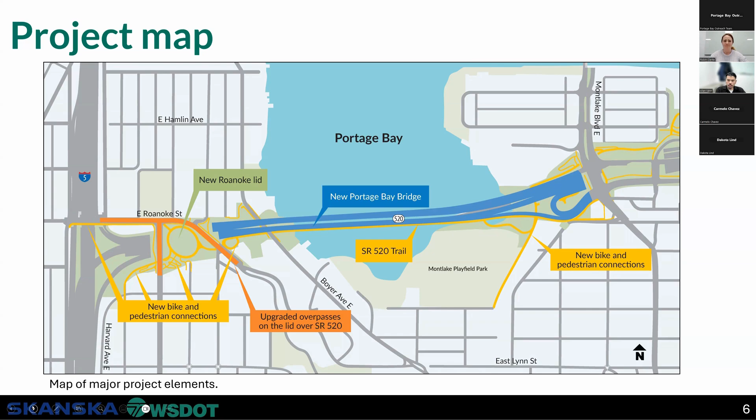So where we're at in our project schedule, as I mentioned, we're in our design process, but we're also starting out in our early stages of construction. So the big focus right now, for those of you who are new and returning, you may have noticed outside in the bay we have some pile driving going on, our barges and those large cranes out there on the water.

The last item on the schedule shows our in-water pile driving seasons. The star at the very top is where we're at, and part of that Portage Bay North Bridge construction is getting the pile driving going for our work bridge so that we can start on our Portage Bay North construction foundations via the work bridge.

We're about halfway through that first in-water pile driving season, which ends on April 30th, and we'll have a couple more seasons throughout this project.

A couple more highlights on here: we have the removal of the existing 520 bridge that'll happen a little bit down the road, as well as the construction of the Portage Bay South Bridge. We'll have the Roanoke lid construction that begins very soon and continues throughout the big part of our project schedule. And then we'll have some landscaping or urban aesthetics, including the regional shared use path connections.

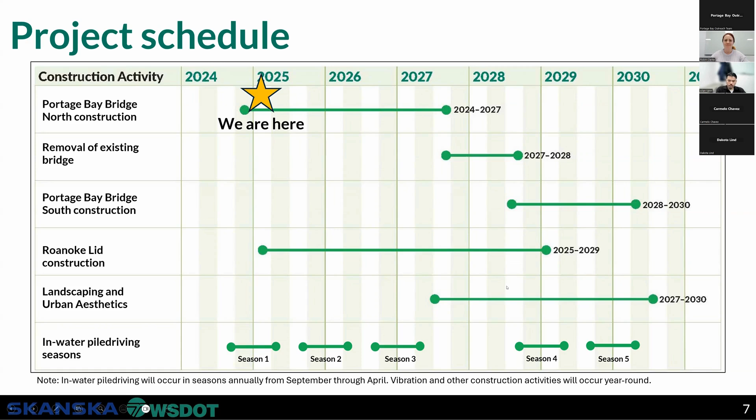All right, with that, I'll get into some construction progress.

So just some overall construction progress updates since we last met. In December and January, we got quite a bit done. We've continued some of our impact pile driving, as I mentioned, throughout the bay.

We're also working through a lot of identifying underground utilities via potholing in different sections around the project. We're doing some soil testing for geotechnical analysis to help facilitate our design progress on some of the local streets you see here on the screen. And we've also been doing some bird deterrent device installations to prevent nesting on the existing 520 bridge.

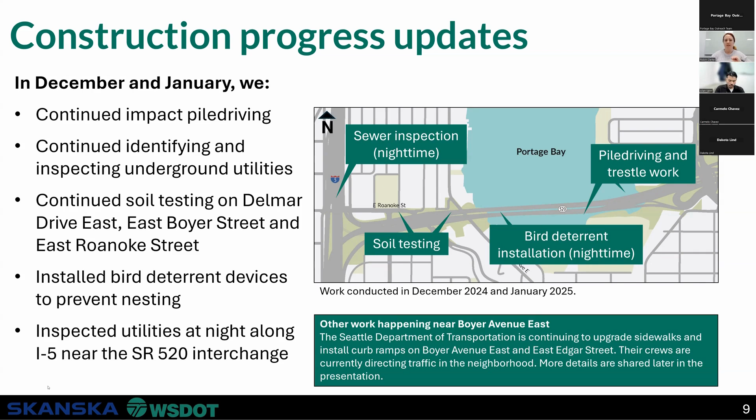And then we've done some general inspection of utilities during the night along I-5 near the 520 interchange. We've also had a little bit of night work this past month.

Some of you may have received direct notices about TNVs or just general outreach, but for the overall progress, we've gotten started on a lot of our utility inspections, inspecting sewer drains along I-5 to get a sense of what's going on out there so we can facilitate our design progress and the connections to the existing utilities. And again, installing those bird deterrent devices along the current 520 bridge.

All of this work has currently been conducted under a temporary noise variance, which would be some of the notices you may have received or seen on our construction corner, which comes with direct hotel accommodations if you're in a certain radius of the work that would be potentially impactful as far as noise and our construction activities. Those folks that we identify would have received a flyer, but if you have any questions on that process, we can answer those at the end.

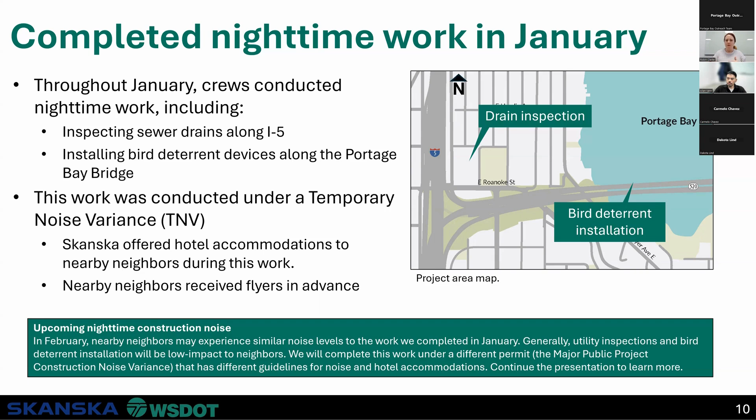We'll talk a little bit more on the noise variances and the upcoming night work in a bit, as well as what that looks like with TNVs, with our MPP CNV. And we'll talk a little bit more on the upcoming noise with our February impacts and what we're looking at down the road.

Starting with pile driving, as our big construction activity right now, for January progress we've been installing anywhere from 2 to 8 piles a day on average. That's kind of our goal, with the sweet spot being 4 per day. That's with all 3 of our cranes and barges currently out on the bay.

We have one on that north side, where you see it in green there, the progress of how we've been getting through our work bridge construction. And then we have two that are currently on the south side, again in that green section.

Our third crew just showed up recently this month to get started on some additional pile driving and work bridge construction. Those two will eventually start working opposite of each other towards the east and west land-based sides. Currently, we've installed 77 piles to date, and we're looking good on that progress.

For another note on some correspondence we've encountered, some folks have experienced days where you might not hear as much noise, or maybe don't hear any noise. That's because our daily goal is 2 to 8 piles a day, but there are some days where we refocus our crews to establish the decking and platform on our work bridges. So there may be days where you don't hear nearly as much noise as other days. We try to be strategic about how we plan our crews to not overlap too much with the pile driving activities, but they do sometimes overlap. That's the explanation behind some of those wavering numbers for our piles per day.

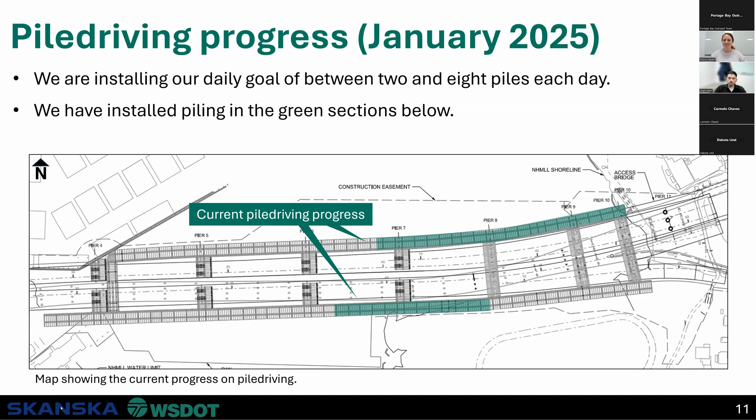All right, with that we'll get into some current activities we're working on this month, now that we're rolling into February. Can't believe the year's already a twelfth over, it feels like it's flying by. So here in February, we are focusing on a couple new areas, but really more of what you guys have been hearing in our monthly update meetings.

We'll continue our impact pile driving throughout Portage Bay, working towards that April 30th date to get our goal of pile installations for certain areas of the work bridge, which I'll talk about in a moment. We'll also be completing some more nighttime work. This time we'll be working under our MPP CNV as opposed to TNVs, and I'll get into the detail of what that includes in a minute.

So we'll be working on some temporary work with the trestles and work bridges at night, and continuing some soil testing and utility inspection at night. Another activity we'll be getting into is removing some trees and clearing vegetation on both sides of the project, but in February we're particularly focusing on the east side of the project, as you see on the map. We'll be getting started in that Valdosta Trail area, which will help facilitate our future construction for the temporary and permanent works of the bridges.

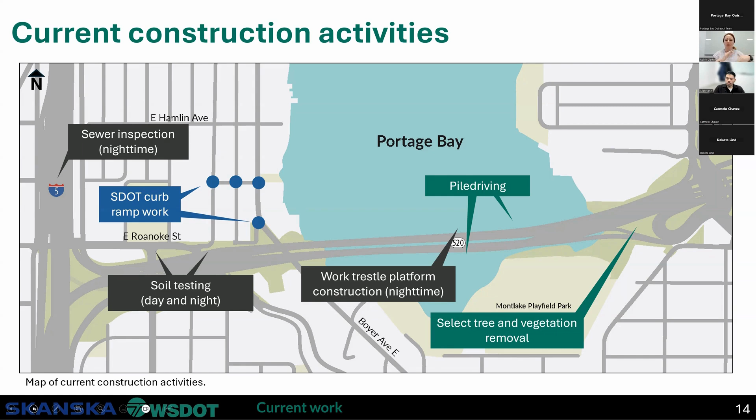So again, this is just an overall big picture map. A couple things I want to point out here: we've got some nighttime works we're looking ahead for in February, those are noted in black. We've got current and upcoming daytime activities in green. And I also want to point out that the SDOT curb and ramp work and street improvements, noted in blue, are ongoing and continuing to progress well in their schedule.

All right, touching back on our pile driving as we look ahead for this month and throughout the spring: we are continuing to pile drive. We started this past fall in the area in orange, working our way towards the west on that north side. We also brought in two cranes, two barges on the south side, and those will continue working opposite each other towards the land.

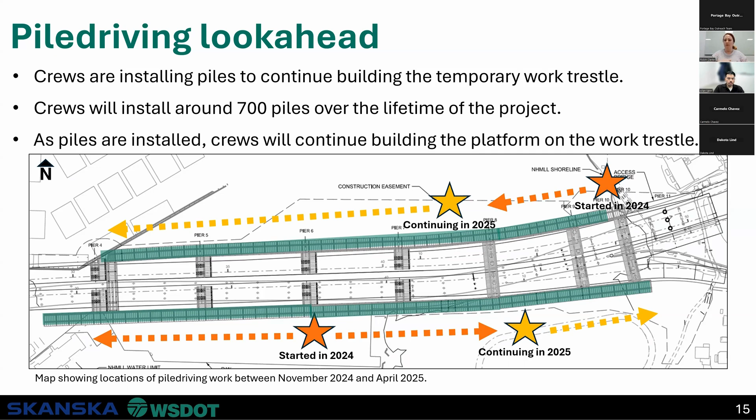Our goal over the lifetime of the project is just over 700 piles to be installed, but this season in particular is going to be 379. Our progress right now is 77, and we're still anticipating that by April 30th we'll have those 379 piles installed. As we install those piles, it'll be anywhere from 2 to 4 to 8 piles a day as we swap from pile driving to vibrating to actually installing the platform and other materials that go into building out what will eventually be our work zone and work platform for building the new Portage Bay bridges.

All right, shifting gears to some other work that we are anticipating in February, just to give you guys a look ahead for some traffic effects to look forward to. That's a terrible phrase because we never look forward to traffic, but to look ahead towards.

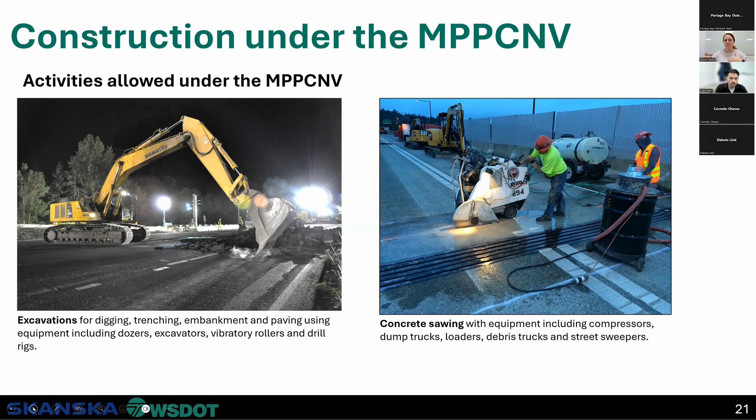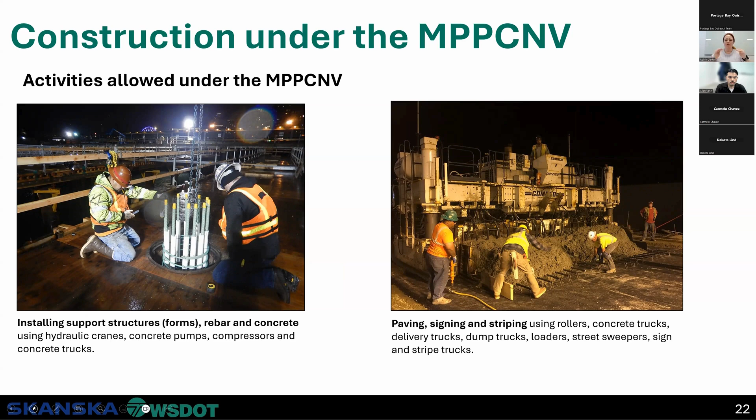A couple other examples here, just some allowable activities under that MPP-CNV will be installing some support structures. Concrete pours are a big one. Paving, signing, striping - all of these activities are ones that we could potentially plan for nighttime activities over the next several years. But again, I just want to emphasize that if any of these activities look like they're going to exceed those noise levels, then we have to reset and adjust our means and methods.

So the typical pounding noise you might hear from any of these activities is not allowed under the MPP CNV, and we have to apply for the TNV through the SDCI. They have to review the legitimacy of that work and provide us with a permit if it's allowed.

All right, and then again, just a recap on all of this. I know that's a lot of information, and a lot of y'all might have some questions with that. One big thing I do want to emphasize is that pile driving for us is not permitted at nighttime. So past 10 p.m., you will not hear pile driving activities from our team. We may have some work on those work bridges, but there is not going to be any pile driving, TNV and MPPCNV or otherwise at nighttime.

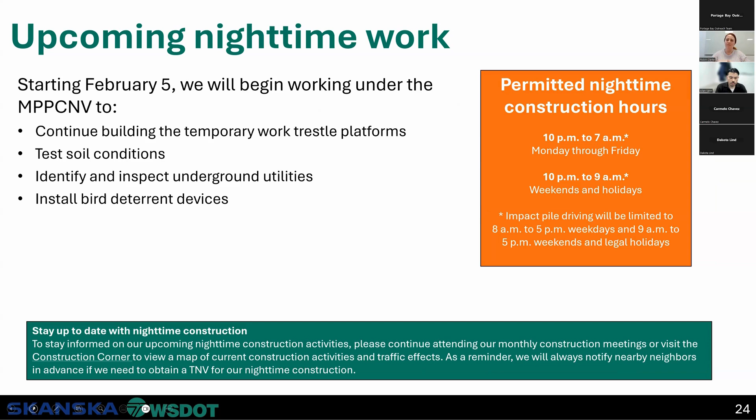So with all that said, I'll roll into some other activities here. I want to emphasize that up until this point, we have not been conducting any impact work or pile driving at night. We've had a couple one-offs for soil testing and utilities, and I know there have been some concerns out there about pile driving at night. It's not happening. We don't anticipate it happening at this time, but we'll keep you guys updated through these monthly meetings on night work and when it's going to happen.

Some additional mitigation measures that we're planning on: we're going to be installing acoustic fence around the site, which I'll talk about in a second. We have some temporary noise shields and other devices that we use around our equipment for noise mitigation. We'll again apply for separate TNVs.

I might ask you to switch back a slide. Sorry, the slides flip too quick.

We'll be prohibiting impact work without a TNV, so we'll go through the SDCI process for that. We'll be continuously monitoring our noise throughout the project and throughout your neighborhoods, and we'll have that noise monitoring data available to us 24/7 for those warning and exceedance thresholds I talked about earlier. If any of that happens, we'll stop our work, assess our plan, and if we can't move forward without exceeding those levels, we'll reassess our means and methods and approach to the work.

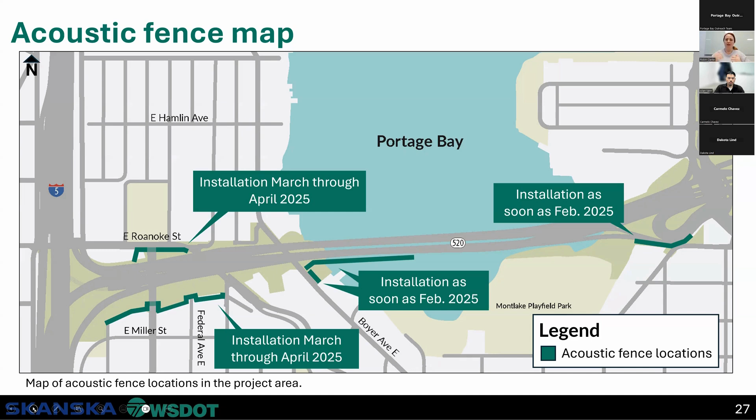Here's a map of those strategic areas where we're installing the Acoustifence. We're working to get some of that installed this month as the work bridges get closer to land, and we have some land-based areas we'll be installing this spring, around that new Roanoke lid area, to make sure we're not impacting folks nearby. That's not to say this is all-inclusive for other noise mitigation measures—we also have equipment noise shields, noise blankets, and other things we'll be using in some of these areas with the night work, again to make sure we're not exceeding our noise levels.

All right, shifting gears here, I'm going to touch on some nearby construction projects just briefly.

Just a reminder, we've touched on this in past meetings, but I want to provide a catch-all one-stop shop for the SDOT curb, ramp, and sidewalk improvement project. For those who live and drive around the Boyer Avenue and 11th Avenue area, you've probably experienced some construction and traffic impacts as they get ready for our project to come in, updating sidewalk crossings, ADA ramp areas, and general hardscape improvements. If you guys have any questions about the impacts, the schedule, or general information, we have contact info for their community liaison, Matthew Howard. He's great to communicate with and can answer those questions faster than we can, since he'll have more updated information than we will right out of the gate.

All right, back to our project, some other upcoming work. Looking ahead past February into the spring and summer, for the next 3 to 4 months we're again looking at impact pile driving, tree removal and vegetation removal starting on the Montlake side near the Bill Dawson Trail.

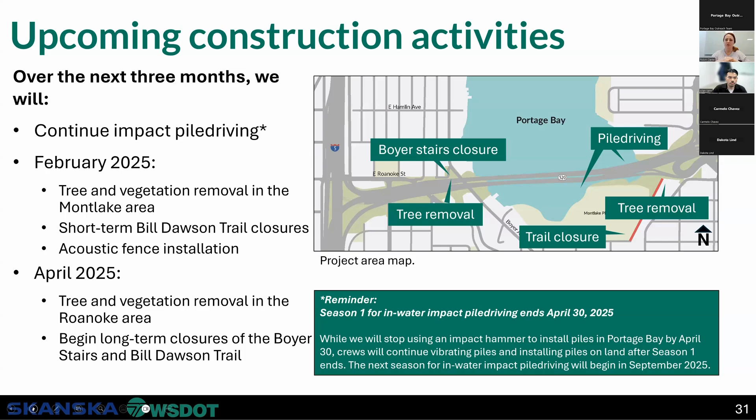Just a reminder that our season 1 for the impact work, pile driving in water, ends on April 30th, and we'll return for season 2 in September. We'll still have barges and cranes out on the water because there will still be vibration work for installing those piles. We may also have some land-based pile driving later this year. I don't anticipate any of that in the near future, but we're working through that schedule now.

Getting into my topic of interest, since I'm working with some of the operations team directly on this, the tree removal schedule. We've been consulting our arborists to strategically remove trees and clear vegetation in certain areas of the project as we get ready for construction activities.

Starting here in February, probably the 3rd-ish week, is what we're aiming for. We'll be focused in that red area on the Montlake side of the project. You guys will have started to see some of the tree removal notices or potentially the protection notices, which are flyers in neon yellow and neon green that we post on the trees. They tell us whether the tree is going to be protected or removed.

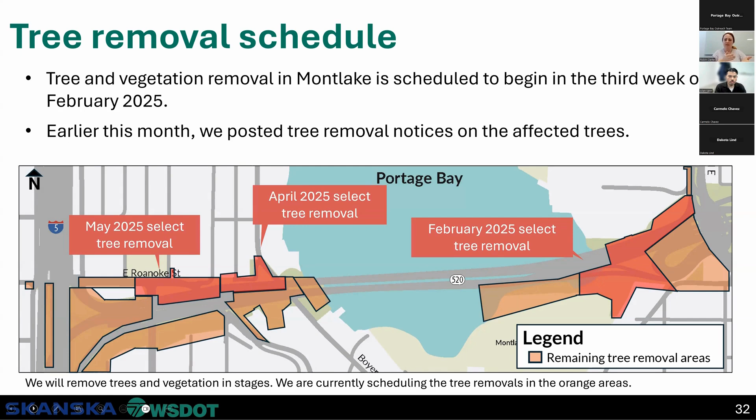It's a notice to the public and our construction team providing more information on what trees are going to be impacted. All of these trees are being assessed with our design team, our construction team, and our arborists to understand what needs to be removed to facilitate construction of the new project, but also what can be left in place so we keep trees that don't necessarily need to be removed if they're not going to be impacted.

Later this spring, we'll flop to the west side of our project to do some select tree removal on the north and south side of the 520 interchange, getting next to I-5. This is in preparation for some utility work and installation later this summer. Then we'll be working toward East Roanoke Street from Boyer Avenue, going east to west on the map there.

All right, another gear shift back over to the east side here. We do have some build-outs and trail closures coming up. A big topic and planning area for us, as you guys know from past meetings, is the Bill Dawson Trail closure, the duration, and the detours.

In February and March we are planning a couple short-term closures and flagging impacts to help us facilitate those tree removals safely, so we can remove things and get equipment and material across without causing safety hazards to the public. For a short-term closure, in this red area we'll post barricades for a 1 or 2 day closure, or we might have a flagging operation for up to 15 minutes, holding folks while we get material across the trail. That's really to facilitate our tree and vegetation removal in that area.

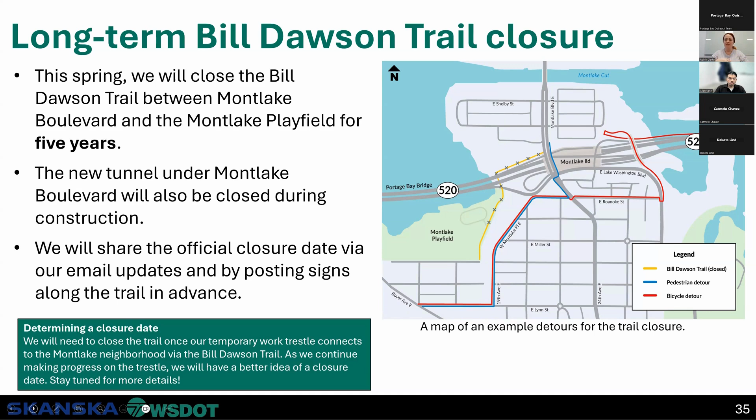So why we're closing it for 5 years, a big part of this is the work bridges that allow us to work alongside the new Portage Bay Bridge area. We'll be accessing our work zones via what you see on this map here, which overlaps with the Bill Dawson Trail. We're going to create an access road that attaches to our work trestle, allowing us to work on the work bridge and begin construction for the new Portage Bay bridges. It also allows us to have generally safe access, eliminate conflicts and interfacing with the public versus our construction, and allows us to bring large transportation equipment - cranes, drill rigs, lifts, and other materials - that'll help with that construction process.

And that also in turn helps us eliminate our need for a significant amount of closures on SR 520 itself. It helps us by allowing us to bring in the barges to help with some of the material deliveries, and reduces the overall impact from our nighttime work plans.

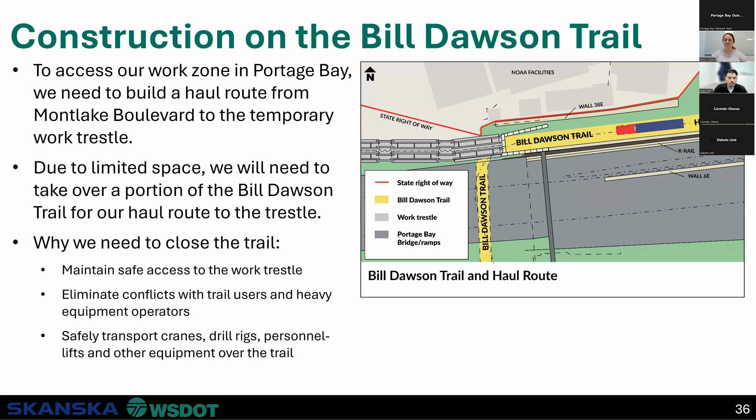A little bit more on that - so the construction here is really focused on the safety for our crews. That 5-year duration is going to include building the access, building the new Portage Bay North Bridge, and the installation of our temporary bridges, which I'll show here in a minute. It's also going to be the connection for our South Work Bridge and the transportation of really large materials such as girders and other big elements that go into the final structures of the project. I do want to note that part of the trail is going to be generally blocked by the embankments and the false work that it takes to build these aspects of our access, but it counteracts the impacts in some of the other areas that we would otherwise be taking with nighttime lane closures on SR 520.

So this is really our approach to the construction, and it allows us to get going on the work bridge. Ultimately, it allows us to start work and construction on the North Bridge without lasting long-term impacts of closing the existing 520 bridge.

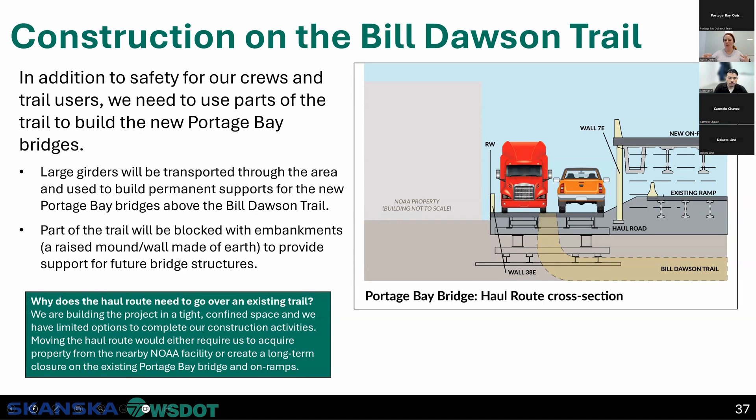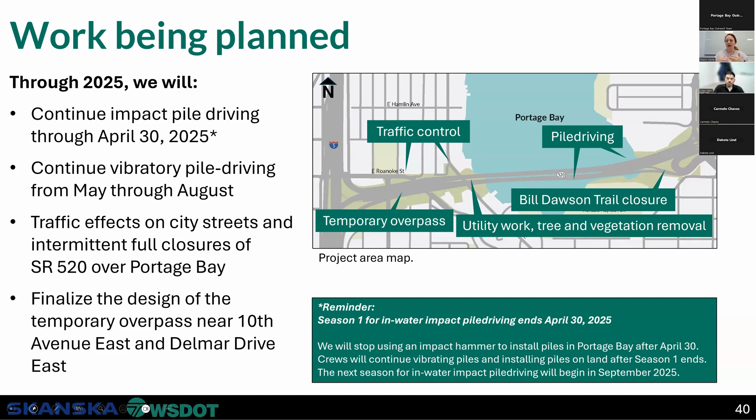A little bit further ahead, some planning, upcoming and construction activities before we move into our final Q&A session. Throughout the year, we'll be continuing pile driving. We'll have some vibratory pile driving this summer. We'll have some city street traffic impacts, and we'll be working through the final design of our temporary overpass by the Roanoke Lid area, which we've touched on in past meetings. We're about halfway through the design process for that, so we'll recap it in a future meeting and give you guys an update once we have more information.

Our season one for in-water work again ends in April, so we'll be continuing that throughout the spring. After that April 30th date and into May 1st, we'll only be doing vibration driving until September. That may not be for the full summer - that may just be some one-offs here and there, but we're still working out the schedule and logistics on that. And then we will have potentially some pile driving on the land over on the Boyer Hill side later this year, rolling into next year.

Another highlight I want to focus on is the traffic effect that's going to be happening this summer. One of our first major traffic shifts, which is part of the process of the Bill Dawson Trail closure and our work trestles, is going to be the construction of what we call our temporary Bridge 1. It's a big traffic shift that we are building out to essentially maintain the flow of traffic getting onto Montlake Boulevard. It allows us to condense the closures needed to do this work into probably a couple full weekend closures and some nighttime closures of the Portage Bay Bridge, some nighttime lane closures. We'll continue to notify you guys when these start coming up.

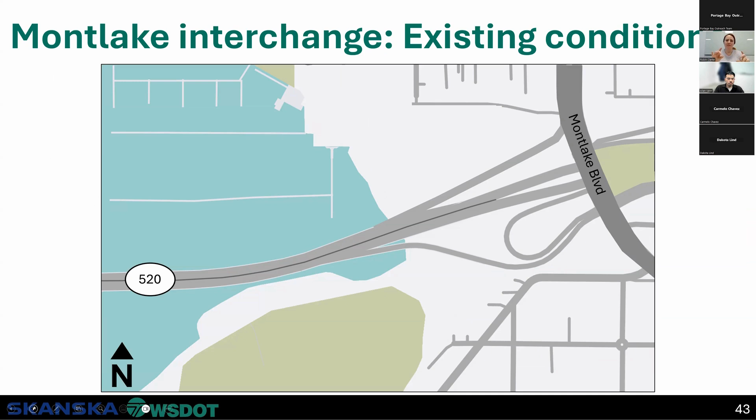So just to give you guys a visual of what that looks like, here's the current existing condition of the Montlake interchange. We're focused on the south side for this summer. What we're going to be doing is creating, in purple, a new temporary bridge and off-ramp to Montlake Boulevard from SR 520, and that'll allow us to close the orange area, which is the existing ramp. This kicks off a series of traffic shifts over the next couple of years that will allow us to maintain a flow of traffic as we get through the construction process.

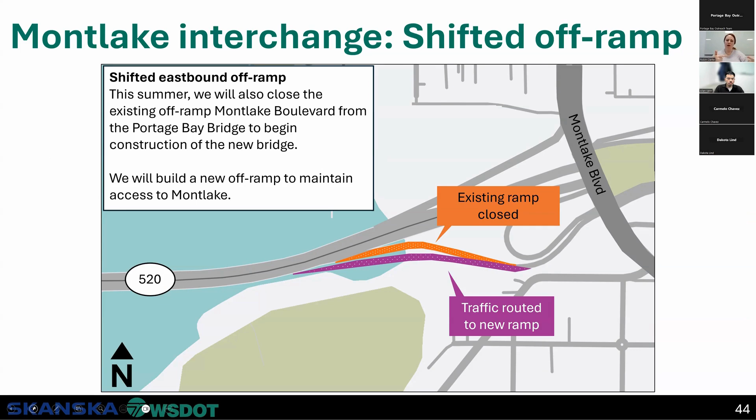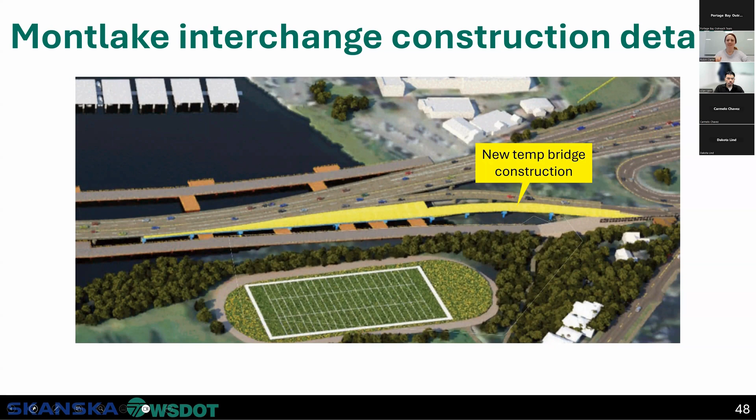And with that, one last thing before we get into Q&A. I think I said that before, but one last thing.

So we do have some utility work coming up this summer as well. This will be over on the west side of the project in the Boyer Hillside area. We're looking at relocating a water line and a 26 kV utility line. We're working with SPU, SCL, and other folks to coordinate that work, and we'll begin in April and work throughout the summer and fall on some of those relocates. That's really going to kick off with our clearing and vegetation removal, and then we'll roll into those utility relocations. We've worked out the schedule to make sure that we're cohesive with other elements of our project, and we'll have that facilitated with some single lane closures and flagging, but we don't anticipate any major full closures on Boyer Avenue.

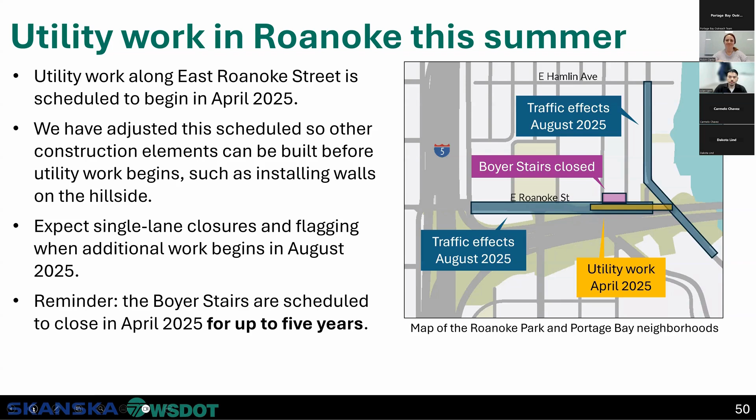All right, so with that, I'll kick it over to Alan. Hopefully I didn't take up too much of our time here for Q&A. Your timing is perfect, Robin.

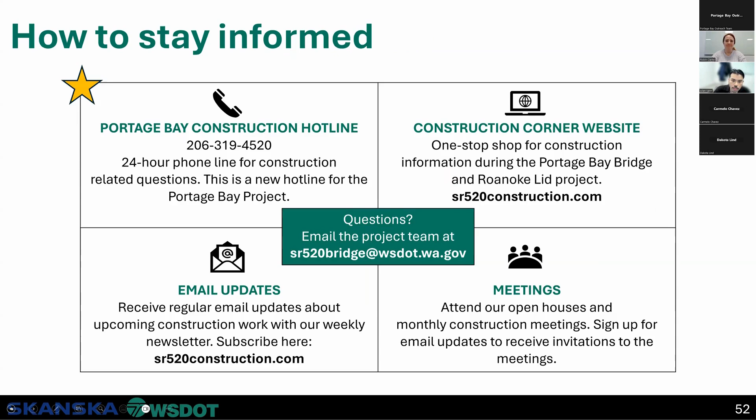Our next question is from Stan: are hotel accommodations available under the MPP CNV? And if so, are the conditions different from those in the temporary noise variances?

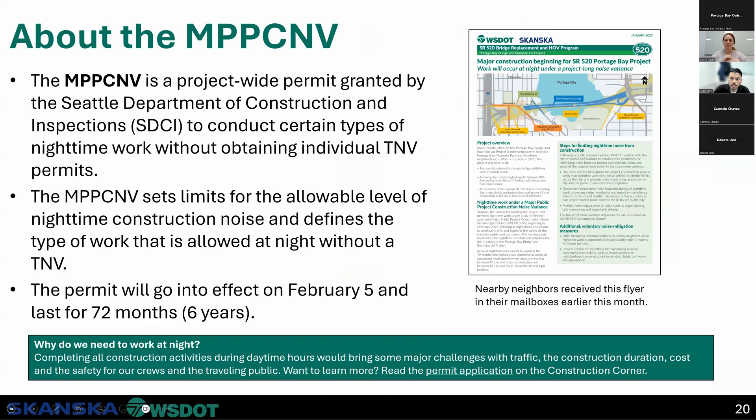I'll potentially clarify with the WashDOT team and our team on some of the logistics, but I don't believe there are any changes between the TNV and the MPP CNV. The major change is really just the notification process - we won't necessarily send out that 300-foot radius notification to folks. We'll still notify people via our other methods of communication, but won't send out specific flyers about the TNV.

Hotel accommodations will still be available. So if you experience impacts from the nighttime noise, you can call us or email us via the hotline, and we can get you lined out with those accommodations.

To elaborate further, if we were to obtain a temporary noise variance from the Seattle Department of Construction and Inspections, there are requirements to notify neighbors within 300 feet of our work zone and offer hotel accommodations. But some of the work described earlier will be conducted under the MPP CNV, which means it can be conducted without the temporary noise variance. So the requirement for offering hotels or specifically notifying folks about that phase of work is no longer required.

For our next question, Greg DuPont asked: the 300-foot radius for offering hotel accommodations for overnight work seems to be mostly completely in the water. What is up with the 300-foot requirement?

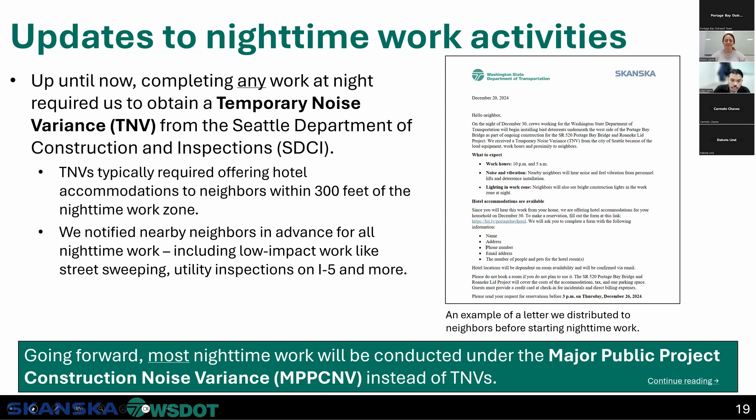The next question notes that there are several different projects happening near the west side of our project - the SDOT RapidRide J Line project on Eastlake, and also the I-5 Ship Canal project, which is not being led by Skanska. Jim was curious what the interaction between those projects would be with ours, if any.

The most immediate interaction is certainly with the SDOT project. We have a weekly meeting with them to understand their traffic impacts, and I believe the construction schedules for their work and ours will line out well, so that most of their work is complete before our work starts on that west side. We're hoping there won't be any overlap, or if there is, it'll be pretty minimal from the impact side of things.

We do try to work through direct coordination if folks are that close to us, though it's not typical that they are. Some of the other closures that are farther out, we may not have a weekly meeting, but we might coordinate through emails or phone calls to make sure we're not having things conflict. We try to touch base with these different projects and establish lines of communication.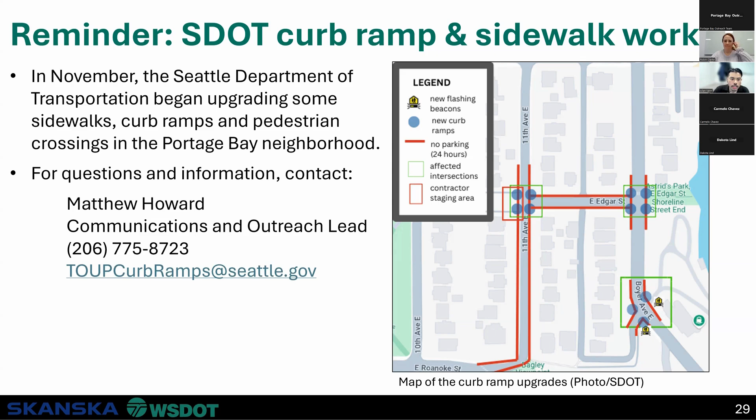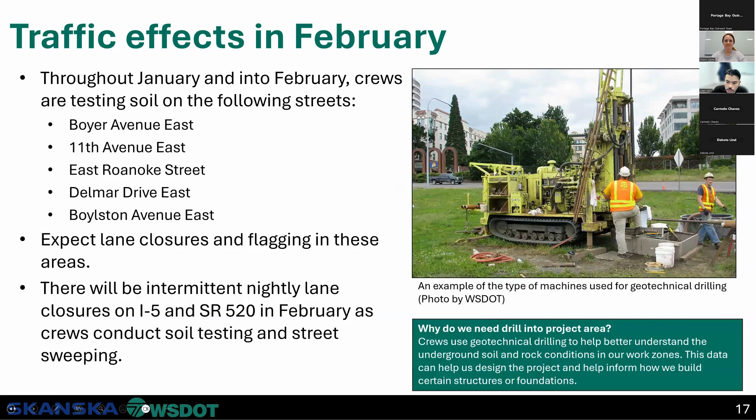Robin mentioned earlier our typical pile driving schedule - it's typically Monday through Friday, Saturdays, and some Sundays. For planning events or anticipating noise, we'll be working Monday through Saturday for the most part, and again some Sundays. If we plan to work around or on legal holidays, we'll make sure to notify folks via our monthly construction meetings.

Somebody mentioned kudos to the construction team for the maintenance of traffic and traffic control crews doing a good job with the detours and bike trails. That means a lot to us, so thank you for that.

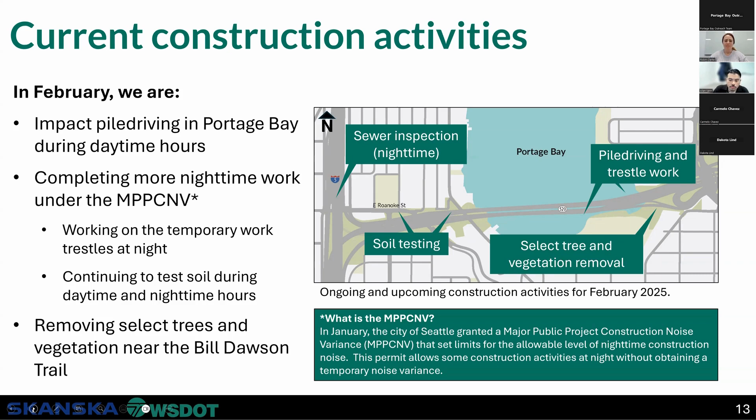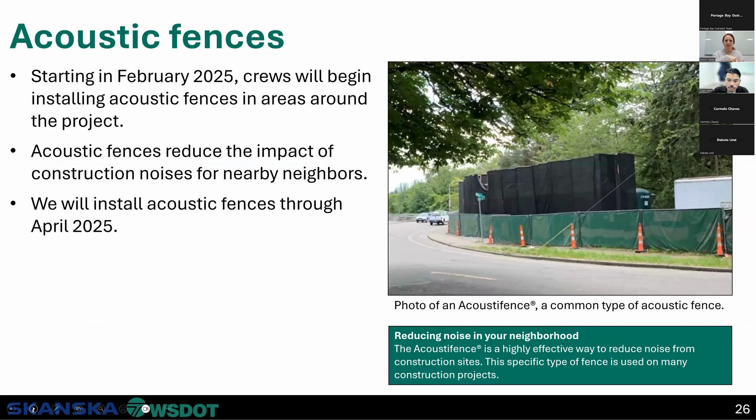Impact pile driving uses a piece of equipment to basically hammer the piles into the ground and underwater, so it impacts them like that. We also have a separate piece of equipment that uses a shaking or vibration method to get those into the ground.

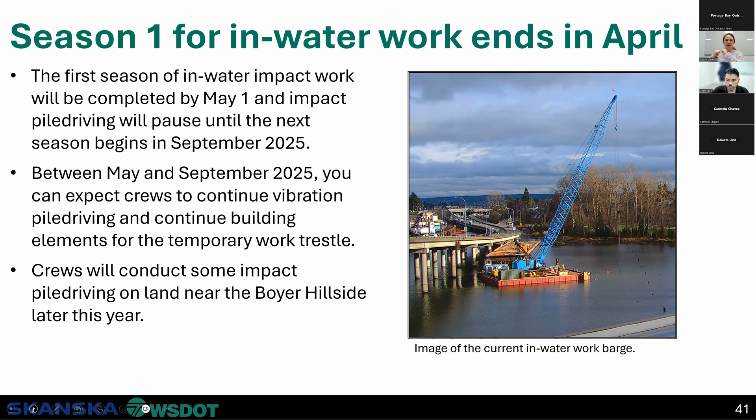The difference between the two, and why we use one versus the other, is that we try to primarily use the vibration method so we can lower our noise impacts and impacts to the community. But a lot of times we get into a hard or difficult ground level or underground subsurface condition with the different geo layers in the bay that the vibration method can't get past a certain point. That's when we bring out the pile driving method to give more impact and push those piles into the ground and establish a good foundation.

So to answer the question, it will be less noise because it's more of a shaking and vibrating rather than the repetitive impact you'd hear from pile driving itself.

Thank you, Robin. Ellen, if you have any follow-up questions regarding the differences, I know we went over that pretty quickly, let us know. We already owe you an email regarding one of your other questions, so we can certainly include that information as well.